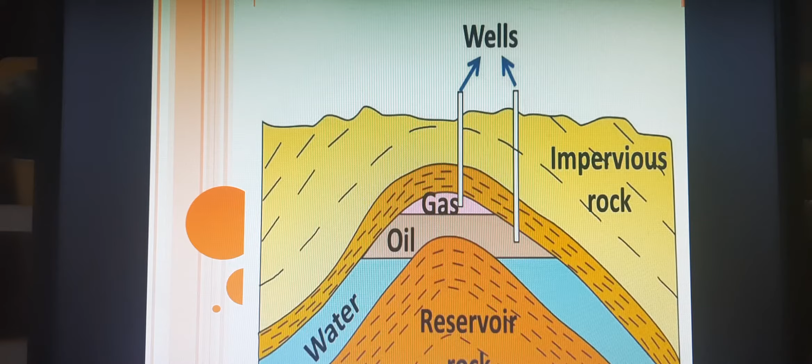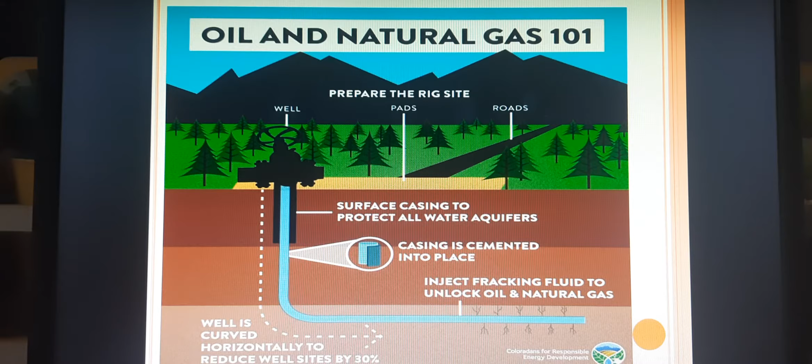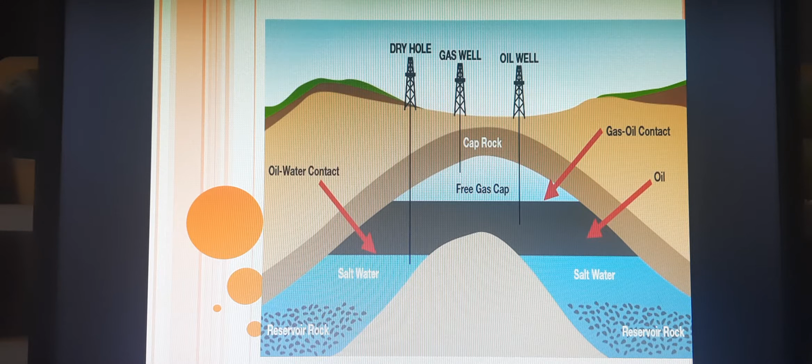Next we are talking about natural gas. Like oil and coal, natural gas is a fossil fuel. It is a non-renewable fuel because it takes millions of years to form deep in the earth before it can be used. Natural gas found along with petroleum deposits is released when crude oil is drilled and brought to the earth's surface. As you can see in the next slide, there is a release of natural gas when petroleum is taken out from the earth's surface. Natural gas is used as a domestic and industrial fuel.

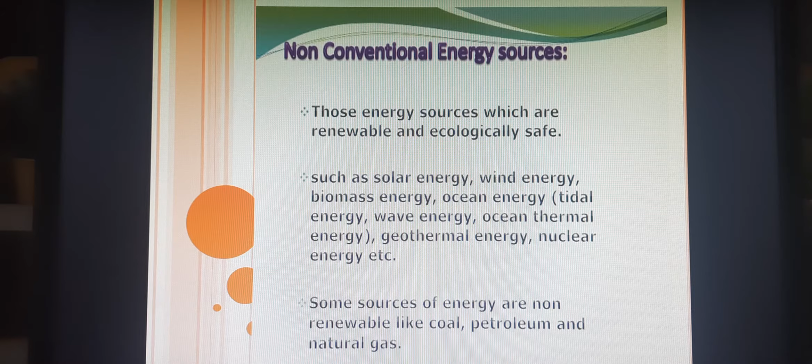Next is non-conventional energy sources. These energy sources are renewable and ecologically safe. The increasing use of fossil fuels is leading to its shortage, so it is estimated that if the present rate of consumption continues, the reserves of these fuels will be exhausted. Moreover, their use also causes environmental pollution. So therefore, there is a need for using non-conventional sources such as solar energy, wind energy, tidal energy, which are renewable. Under that, first we are talking about solar energy.

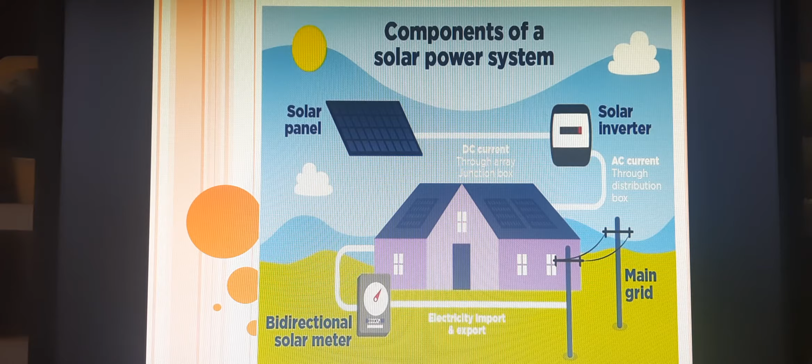Second non-conventional source is wind energy. Wind energy, like solar energy, is a non-conventional and inexhaustible source of energy. Wind farms with a cluster of windmills have been set up at windy places in many countries like Germany, UK, US, China, as well as in India. When strong wind turns the blades of the windmill, it turns the generator and produces electricity, and it is a safe and clean energy.

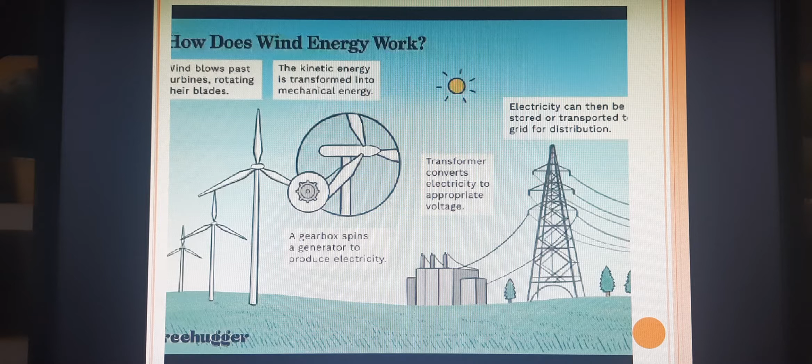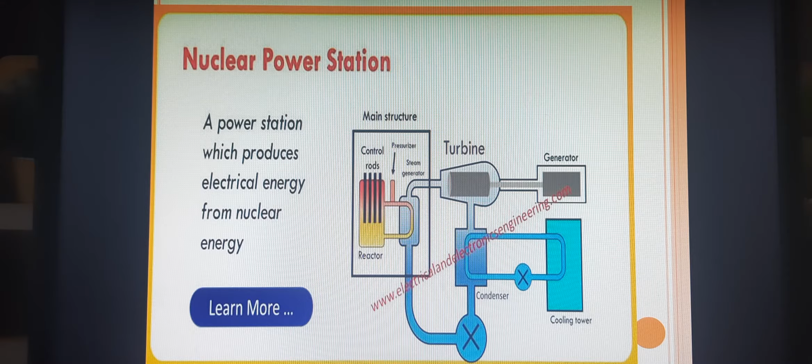Next is geothermal energy. Heat energy obtained from the earth is called geothermal, like in Manikaran Sahib, which has a geothermal power plant. Geothermal energy is released naturally from the earth's surface. The temperature in the interior of the earth rises steadily as we go deeper. Sometimes the heat energy may surface itself in the form of hot springs. This heat energy can be used to generate power.

To generate geothermal power, there are two holes which are dug deep into the earth. Cold water is pumped through the first one while steam comes out through the second one.

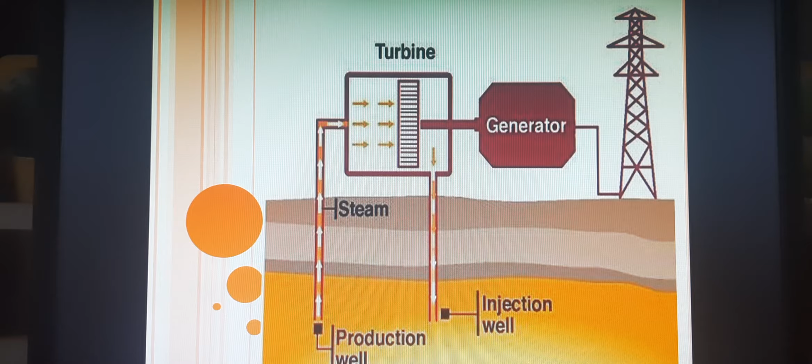Next, we are talking about hydroelectric power. Hydropower is energy that comes from the force of moving water. The word hydro means water. Hydropower is a renewable energy source. It's produced by harnessing the flow of water and converting its potential energy into electric energy.

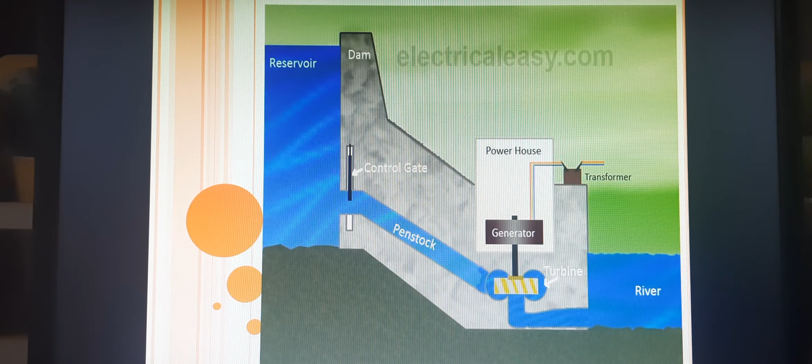Large underwater turbines are placed in areas with high tidal movements. It is being successfully used in some areas of India, like the Gulf of Kutch.

It helps farmers to generate heat or electricity for domestic consumption at a low cost. The biogas fuel is a mixture of methane and carbon dioxide.

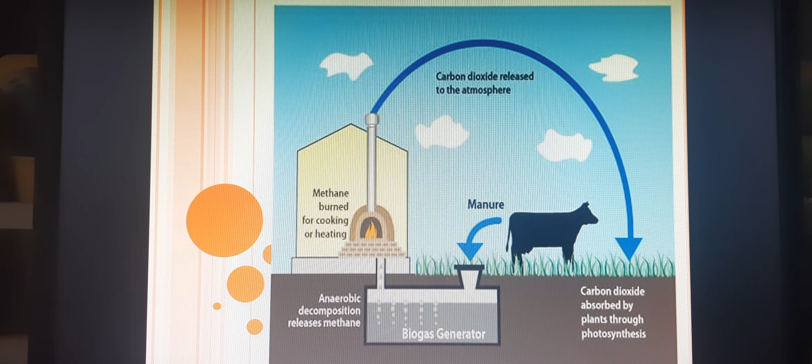So with this, we have discussed mineral and power resources. I hope you all understand. Thank you very much.